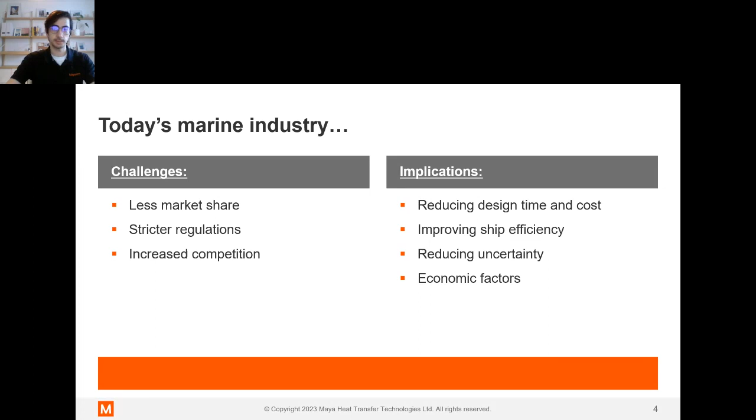This is also supplemented, as I mentioned, through the prevalence of industry advancements. More and more, we're seeing that newer technologies are becoming available, or new advancements are making otherwise designs which were too costly or complex or simply infeasible are now becoming much more attainable. And this is through either new technologies or new tools and methods in the design and or the analysis, opening the door to these new opportunities.

So let's couple those two facts together and looking at them through the previous challenges that I mentioned. It's clear that there's a huge opportunity here for innovation as a response or an answer to those challenges that I mentioned. And right now, with what I said, I think the environment for doing so is well prepared.

Because of the state of the art, there are more possibilities right now than ever for variations or innovation on ship design, or even just the possibility of validating the behavior of newer ship designs. More complex methods are making what was previously thought unachievable more feasible and more realistic. So the list of what is possible in terms of technologies or methodologies is ever expanding.

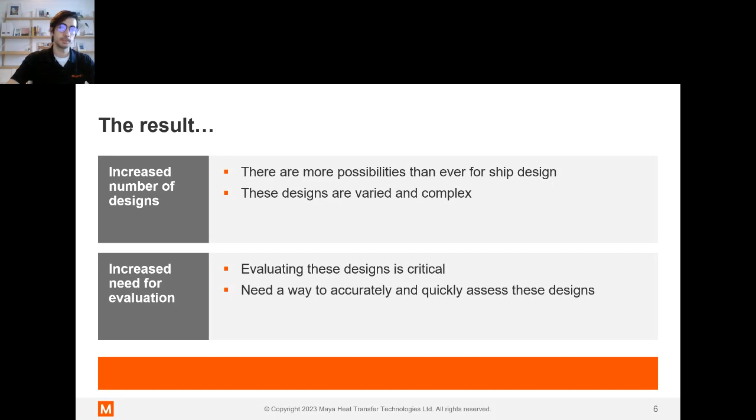So that takes us to system simulation, which we'll be focusing on today. Here we'll discuss system simulation in a bit more detail and how it fits into the landscape of ship design and performance analysis and a little bit beyond that.

So system simulation as a whole allows us to take a very high level look at a vessel or any system really, and all of its subsystems, particularly from a model-based approach. So models can be of one simple element like the engine, the transmission, HVAC system, electrical components as well, or these can be put together and look at the entire ship as a whole.

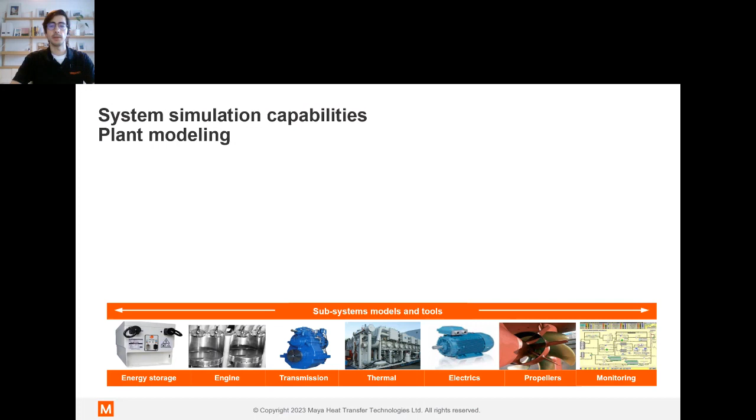The type of analyses which can be performed through system simulation are varied. Ultimately, it's really up to the user. This is a very flexible approach, opening the door to a lot of possibilities in terms of the types of analysis which can be conducted. We'll explore more of that shortly.

Ultimately, the analyses, although varied, are all characterized by being generally very quick to run and dynamic in nature. This is critical when we're looking at having a need for assessing early on different design possibilities and how feasible they are given different operating conditions.

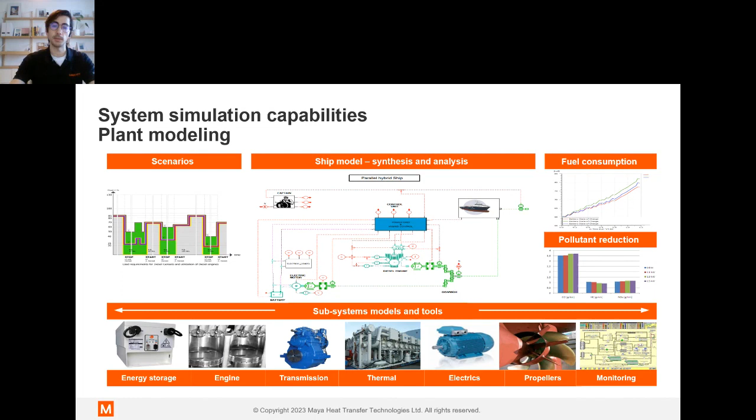A great example of this in action is the selection of propulsion architecture given a certain operating condition or journey for a vessel. In this case, we have an analyst or designer looking to choose early on between different propulsion architectures, with the possibility of different hybrid configurations, full electric, or even conventional combustion.

What's needed here is a way to quickly assess the architectures given the same operating load, and understand and draw conclusions as to which ones are going to be feasible, or at the very least, which ones are most feasible and worth pursuing in terms of having the most potential.

This can be addressed via a system model of the ship and all of its critical elements necessary for answering that question. In this case, that would be modeling things like the hull and its interaction with the water, propeller, driveline, and also the propulsion system, which would have multiple versions depending on the ones we want to analyze and compare.

We're able to understand the effect in terms of fuel consumption or energy consumed, and other things like vessel speed. A system model can do this quickly and answer the question very quickly, allowing us to narrow down our selection to the ones which have the most capability and focus efforts there.

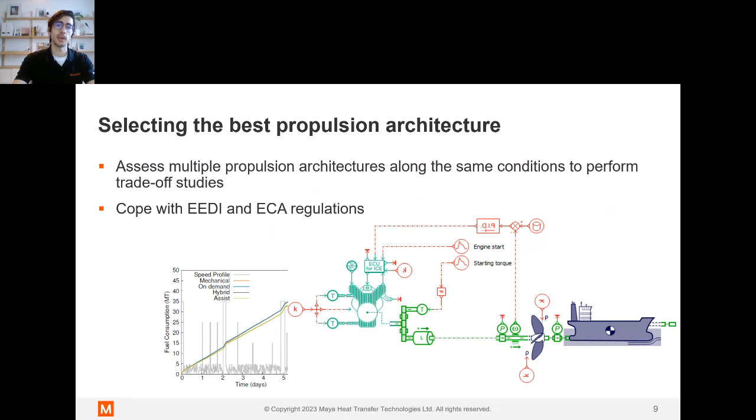Ultimately, the earlier we can do this, the better, as we can focus the efforts and be more efficient with when we're spending our time.

In system simulation, we're using something akin to mostly a lumped parameter approach, and this can be considered different from traditional CFD or FEA analysis in that we can do this before any geometry has been created. We don't rely on any CAD geometry in system simulations. There is no meshing that's needed. We're more concerned with individual components representing things like the hull, the propeller, or even the sea state, and a few others.

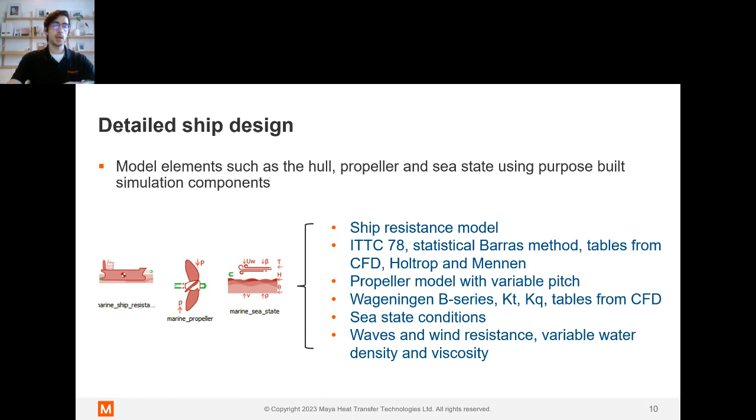System simulation also allows for a lot of customization or user input, embedding results from other tools within these models by using things like response surfaces or lookup tables, as well as supplementing the analysis being performed via scripting and other means.

In addition to hull and propeller modeling, the strength of system simulation really is in the name - it's being able to integrate these different subsystems together and understand the interaction as a full ship. Whole ship modeling, as we can see here, allows us to do a number of things.

First of all, assessing the power distribution or the power consumption of different elements. In this case, allowing things like power budgeting over the course of a journey, while including things like hotel loads on the overall ship power system, and understanding how that budgeting will work.

Other things we can do is, for example, understand the impact of the operation of one piece of equipment on another over the course of an entire mission.

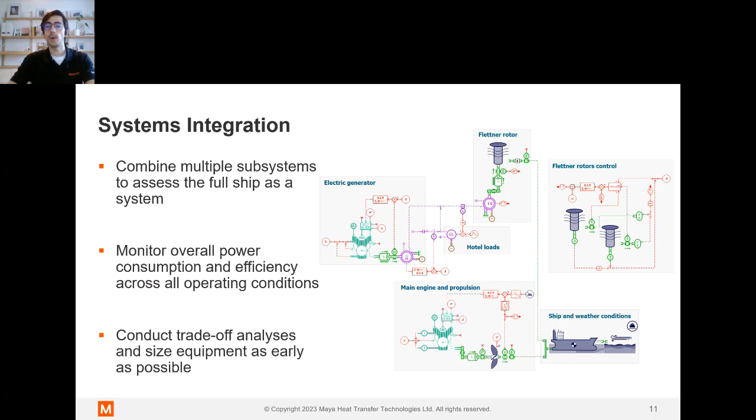The approach is very different from finite element analysis or CFD as well, mostly in that it allows for a much broader scope of what's being assessed. In this case, we are focusing much more on whole system performance or equipment sizing rather than feature design or concerning ourselves with geometry.

I wanted to share these as an illustrative landscape of what is possible. They're by no means limited to this, but ultimately, what we want to understand is that these models are inherently multi-physics and well integrated together.

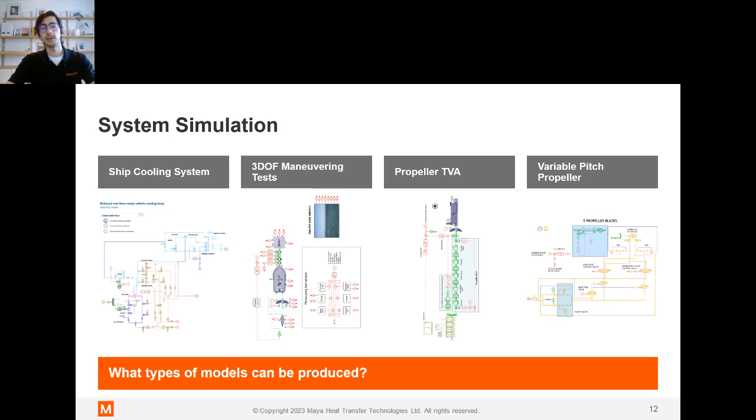Beyond just the system models, we also want to talk a bit about the capabilities, and inherently system models are very modular and also very interoperable. What I mean by that is they work very well with the inclusion of data or whole models from other simulation code. For example, we can extend these models to work with 3D simulation by using an open standard called functional mockup interface, effectively embedding one model in another and allowing it to communicate.

Capabilities like this mean that a system model has a lot of potential to grow as a project expands and maintain its usefulness.

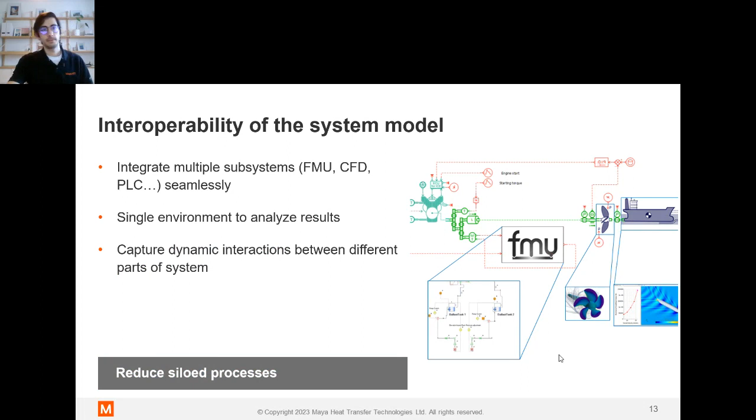So in this example, a CAD model can share information with a number of different tools. For example, a system model can have information coming from a general P&ID for understanding dimensions and scaling. Additionally, we can include data from a separate CFD result of a propeller into a system model to inform a much larger model that includes things like the driveline, then assessing the impact on the engine or whatever propulsion system is selected.

So what this means ultimately is that a system simulation model is a great springboard towards a number of other large-scale questions around the design and operation of a vessel. Like I had indicated earlier, this is a great way of integrating data from other design studies or analyses and reducing siloed processes when we're going about ship design.

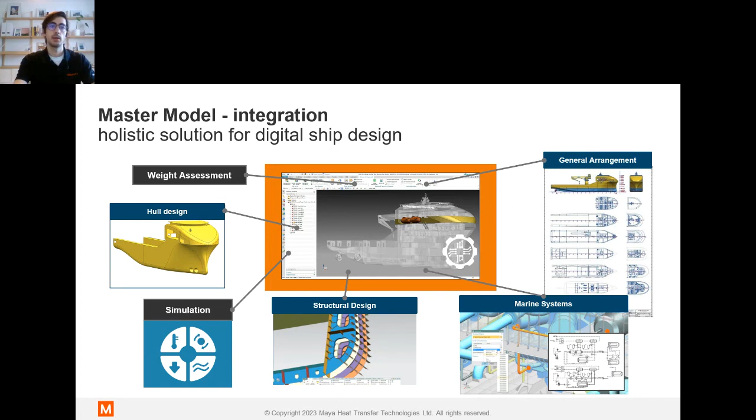So we talked a little bit about the core functionality of system simulation. Here we're going to expand the scope of the discussion to address that point I made earlier on expanding the usefulness of these system simulation models. We'll take a look at what else can be done, leveraging the lightweight modular nature that I was talking about earlier.

I think the first thing that we can do with a full ship model, which in this case would include sea state modeling as well, is some route planning. For example, we have the ability in a system model to include data for wind, waves, and other real sea conditions. We can link this to general ship advance over the course of the mission, or even GPS coordinates. So combined with a vessel model, that allows us to understand things like max speed, fuel consumption, and route duration as a function of some of the other input requirements.

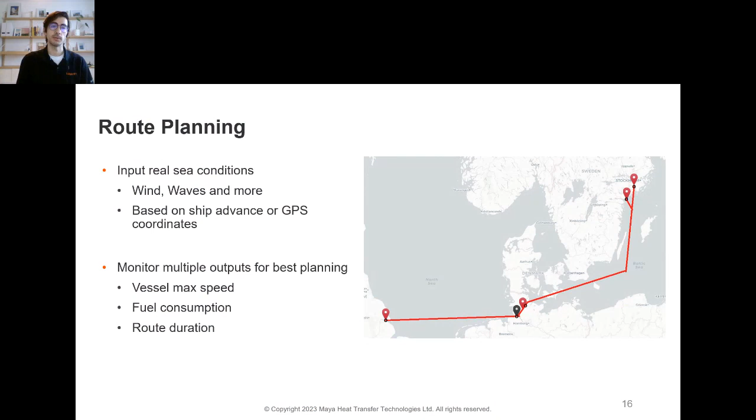So in this example, we can see a vessel undertaking a common route across the Baltic and North Seas. We could run this route at 11 or 13 knots and assess both scenarios. In this case, the system model of the vessel would contain the propulsion architecture and different variations there, and also a few of the other necessary things like the propeller and hull, like we mentioned before.

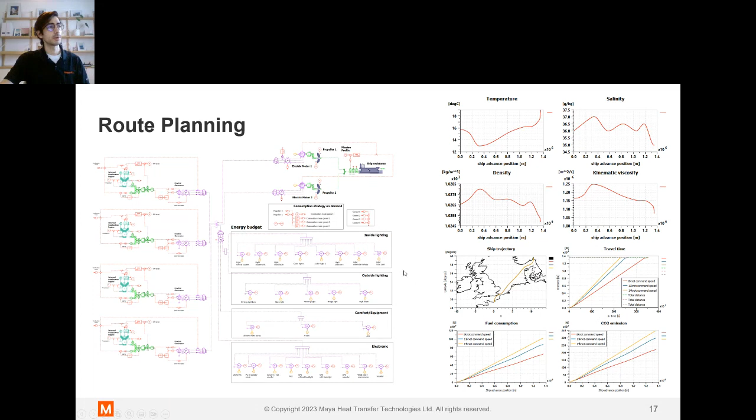We could also go a step further, including all of the electrical consumers for the hotel loads for energy budgeting, as mentioned. Then we can make assessments on the different types of propulsion architectures, like I had indicated earlier, but also compare things like journey duration, fuel consumption, and even extend that to projecting CO2 emissions over the duration of the journey.

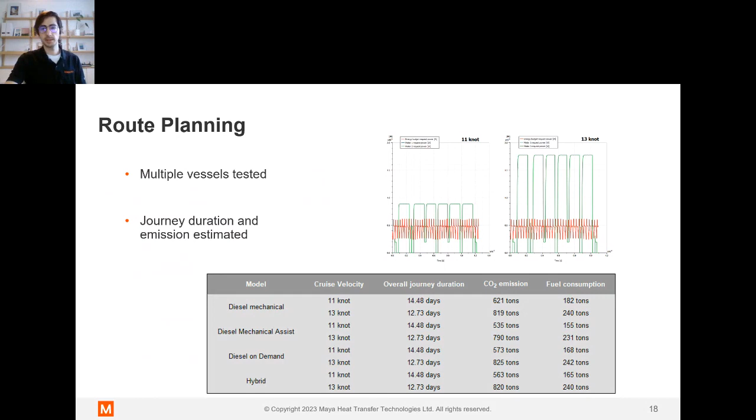So moving on from that to a new topic that also extends the capabilities of these system models, we can further extend them by leveraging them in processes like generative engineering. Here we are looking at ways of going beyond our typical approach for exploring design options. Typical design studies, by the time simulation begins for these processes, we're already locked into a limited number of designs, whether we know it or not. We've limited things in terms of architecture selection, just based on what we're considering.

By opening things up and using AI-based processes, we can really open the door to all possibilities, even ones that we would not have considered at all. And so here we extend this to ship design. Generative engineering means that each part of the vessel can be considered separately, and we can consider the connection of all of these different parts or subsystems together, but also understand how each one can vary in terms of its characterization.

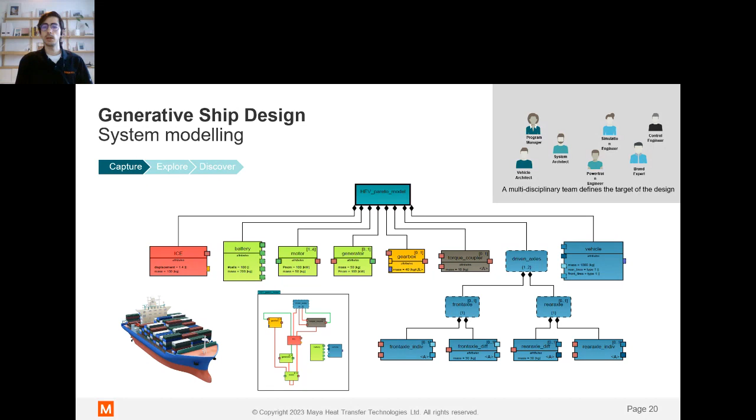So all of this would be captured and used as a starting point from which we can then generate hundreds or even thousands of different kinds of designs from that one initial seed model. Once the basic architecture is set, it's possible to generate those multiple variations and different configurations, automatically assessing their performance for given target criteria. Each of these will be evaluated and ranked. At the end, we can assess the different designs, but also manually intervene and reinforce the process by coming in and understanding, based on our knowledge, what might actually be better, promoting certain designs and reinforcing what is actually more desirable than others.

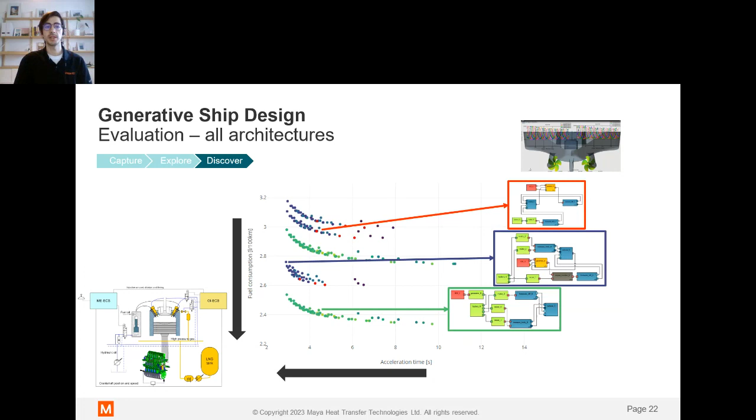So in this case, we're performing generative engineering through the use of computational notebooks, using narrative text and math. Models as code in this case would be integrated, and as you can see here, automating model block diagrams. This kind of provides a means for performing engineering and reporting all at once.

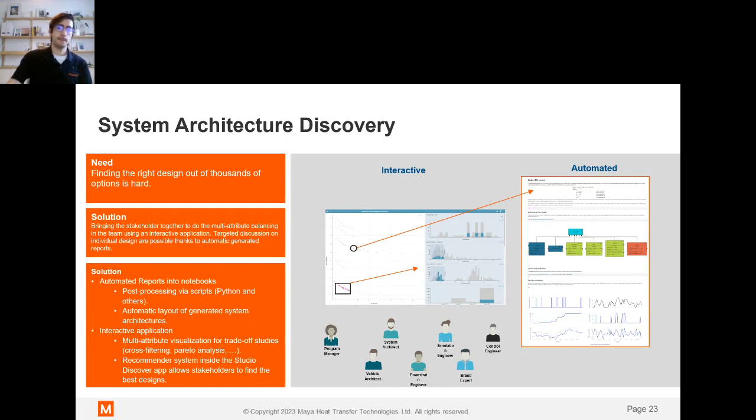The last topic of discussion that I want to get into is another avenue for extending the use of the system models. Here we're looking at digital twins, and the term digital twin is something that's being used more and more frequently. Ultimately, there are many different versions of a digital twin depending on its intended purpose. Here we're looking at, for example, leveraging a system model in an operational digital twin, where we can leverage things like creating lightweight and portable versions, even lighter weight than the system model, by leveraging things like reduced order models.

The point of this is to be able to embed these in other processes that would take in real-time data from a vessel using things like telemetry or other data being fed in from a vessel in operation, leveraging the model to make predictions about the state of a piece of equipment that otherwise can't be instrumented or known about through conventional means. So we can take other data from the vessel, feed it into a model, and make decisions on things like ship operation when extending beyond a desirable operating zone, or even conducting predictive maintenance using intelligent models.

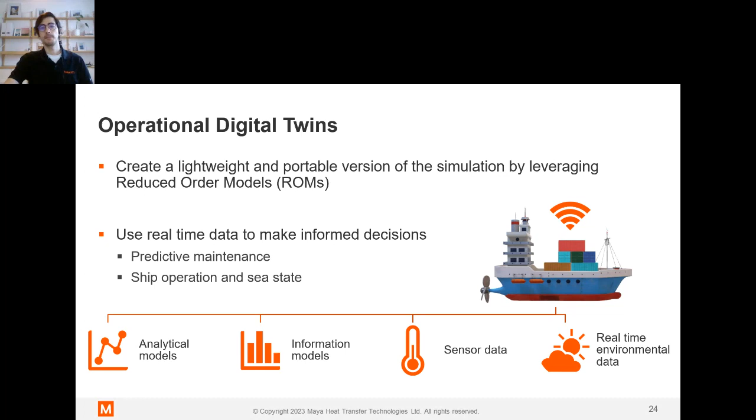Another one would be executable digital twins alongside the actual real equipment in the field, on site, or at sea. And however useful, the challenge is we're taking in huge amounts of data, generating terabytes of it. The challenge ultimately is, with all of this available data, how do you parse it and access what matters, effectively separating the wheat from the chaff.

This is also something we can address by helping to develop the tools to intelligently sort through all of that data, extract relevant parts, and link that to the root causes for certain events. So this is what's beneficial in terms of being able to reuse these models in an executable or operational digital twin scenario.